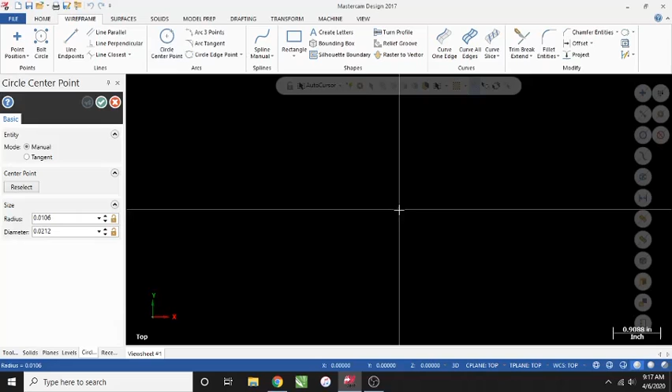So here's what we're going to do. We're going to start by going up to wireframe and selecting the circle center point. I'm going to click in the center and draw my circle out. It's still highlighted in blue, so I can change the diameter—I'll change that to a 6-inch diameter. Then I'll click the green check mark.

Now our geometry is bigger than our viewing screen, so we can hit Alt F1 on our keyboard and it will center it, then I hit Alt F2 and it'll make it a little smaller. If you have a wheel on your mouse, you can scroll in and out to make it smaller and bigger.

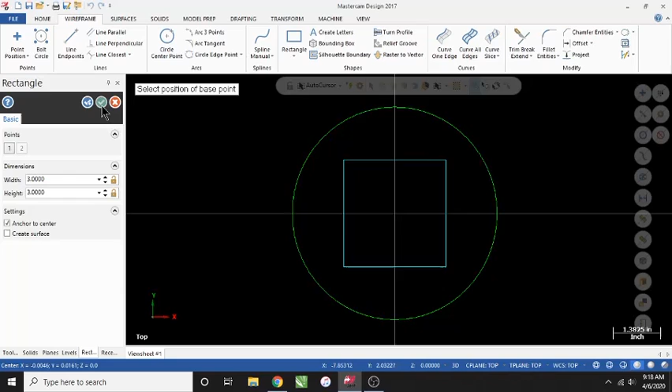Now we've got to add something else to this, so I'm going to do a square. I'm going to click on the rectangle, anchor to center, and put in 3 and 3, then go over and click in the center. That's a little bit of the lag I was talking about. We'll click the green check mark, and now we have our geometry.

This is the geometry that we're going to use for this solid—this is all the geometry we will create. Okay, so now we're ready to create our solids. We see our solids window over here so we can see what's going on after we've created it.

We're going to go to solids, then extrude, and I'm going to click on that circle and click the green check mark because that's what I want to extrude, and we see that we got a solid.

Now in the boxes over here we have some options—we've got extrude, which is what we've done, create body, cut body, and add boss. We're going to use create body, then change the direction because I want that to go down, and I'm going to change the thickness to 2 inches.

Okay, now we're not going to close out of this because we're going to do more operations. The next thing we're going to do is put a hole in it.

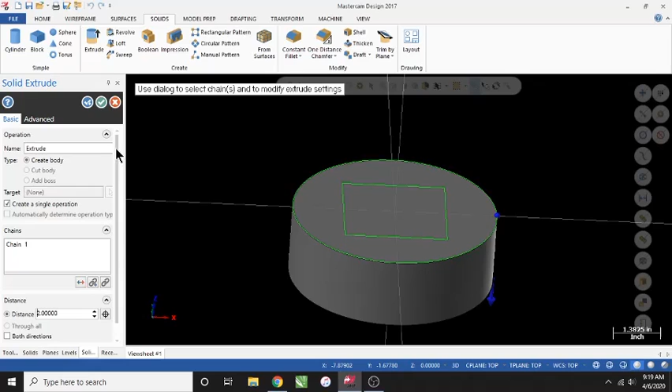So we're going to hit the blue check mark as a plus, leave it over here on chain, and select the square. Click OK. Now it's going the same direction, but right now what we've got is create body—we want to change that to cut body.

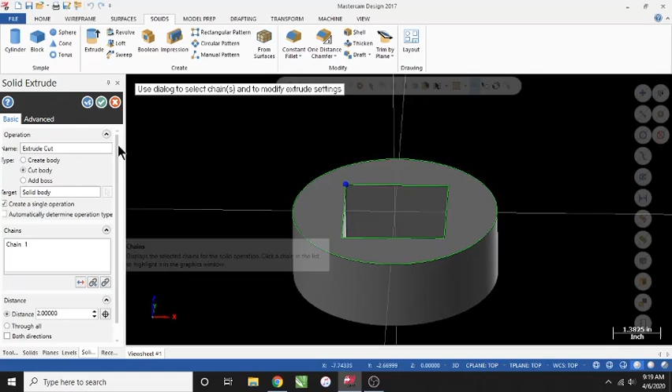Now we've just put a 2-inch hole through there, and we're going to click plus because I'm going to add to this. I'll select that same square, click OK, change it to create body, change directions, and leave it at 2 inches. So now we have created 2 separate pieces.

See how I click on that? Just the bottom highlights. I click on that, and that one highlights. Over here in our manager, we see we have 2 solids.

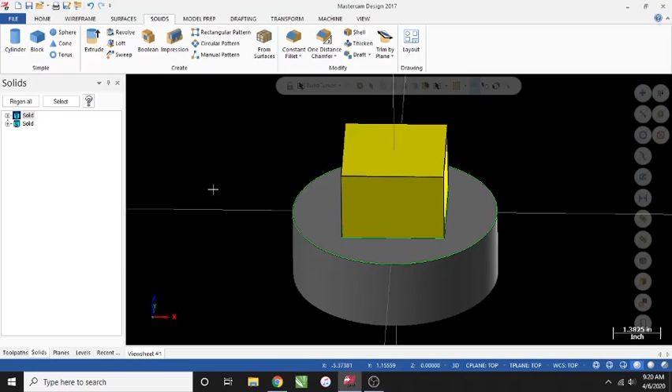Now what I want to do is make those one solid. You would think that because we used the same square to create the hole and the box on top, they would all be touching, but they're not actually touching. So with the highlighted box, we're going to go to transform, and I'm going to translate.

I'm going to click on move, and then I'm going to say minus 0.01, 10 thousandths, and I hit enter, and I'm going to click the green check mark.

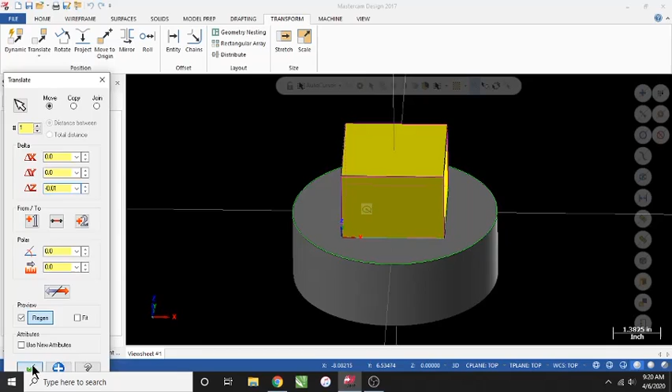We're going to have a box pop up saying you have geometry that you did not move, or wireframe, asking do you want to move the wireframe defining entities, and we're just going to say yes. Okay, so now we have this set 10 thousandths down inside that.

We can go back to solids, and what we're going to do here is we're going to make these one.

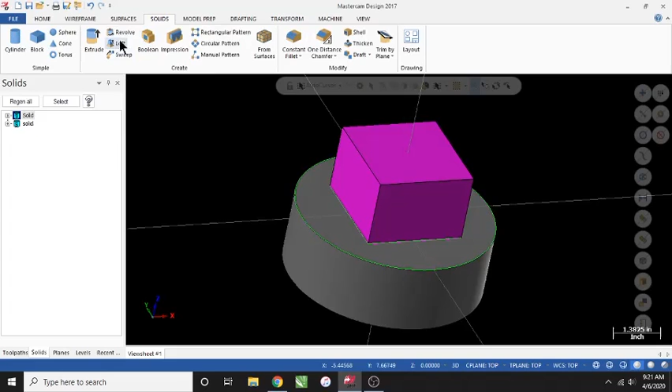Okay, so I'm going to click on Boolean. We're going to do a Boolean add, and it's asking for the target body. There's our target body, and then it says the tool bodies.

We're going to click that box, and we're going to click the green check mark. We're doing an add. We have a solid, we have a body, and we are done with that.

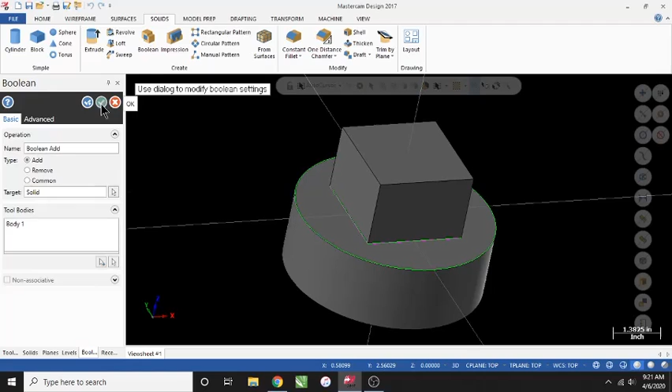We click OK. Now look, we just have one. And if I click on this, they all turn yellow. That is the Boolean add operation.

Now with this, we're going to do some stuff to just make it look a little more like a part. So what I'm going to do is I want to do a fillet.

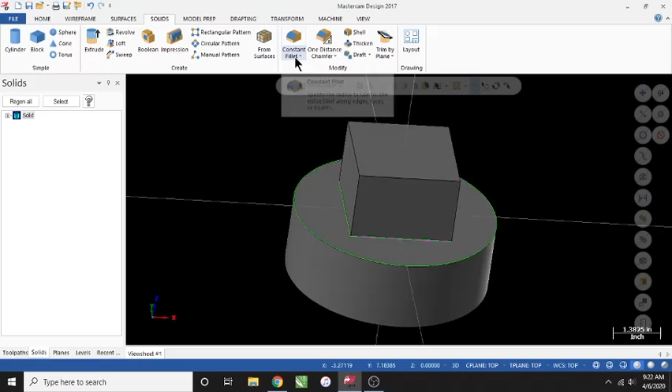I'm going to do a face-to-face fillet. And I'm going to click on this face, rotate it around those three faces, and then I click OK, and it's going to ask me to click on the second face.

So I'm going to click on that face, and it's going to come up. We have face-to-face fillet with a radius. You can see that radius is in there.

I'm going to scroll down on the left, and I'm going to change that. I want a 0.25. Okay, so we have a 0.25 radius in there. And then we can click the green check mark.

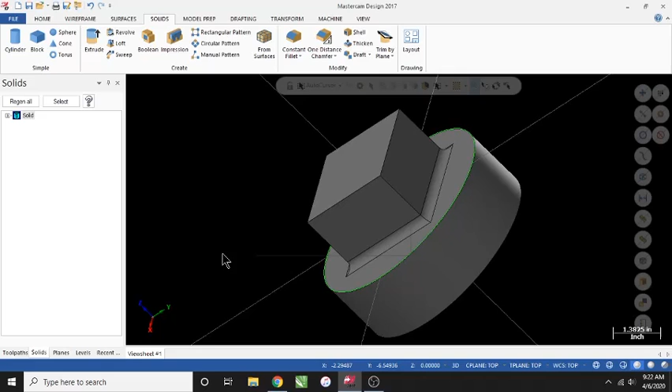I'm going to right click here, and I'm going to go isometric view. Okay, now I want to do a constant fillet because I'm going to make it look a little better than what it is. And I'm going to clear those two out because I just want the edge.

Okay, and I'm going to do all these edges along the top, along the side.

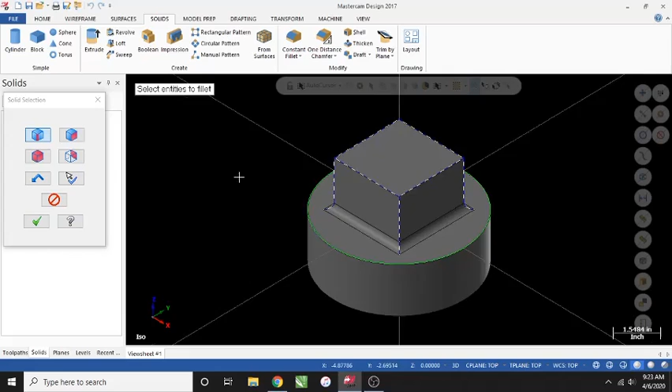We'll click on these edges, and we don't want to forget the back side. Okay, and we click the green check mark, and it puts a 100 thousandths radius on.

Now that's just the default. I'm going to change that also to 0.25. And it looks like that. Okay, so now we have that.

Maybe I want to go ahead and put a 0.25 radius out here on this edge. So I'm going to hit plus, and I'm going to select that. Now I have a radius on that.

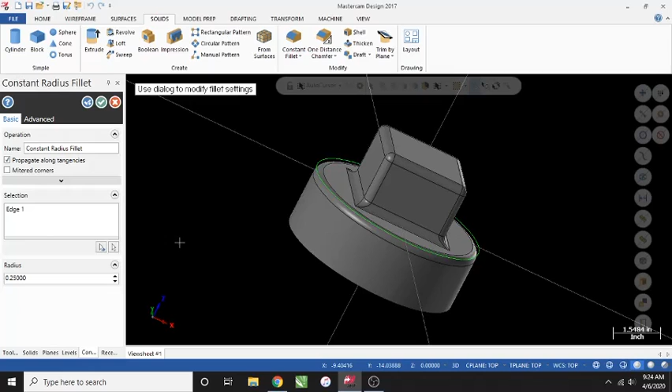It's that simple. So I'm thinking to make this look even better, I'm going to go inside here, and I'm going to put a radius on the inside.

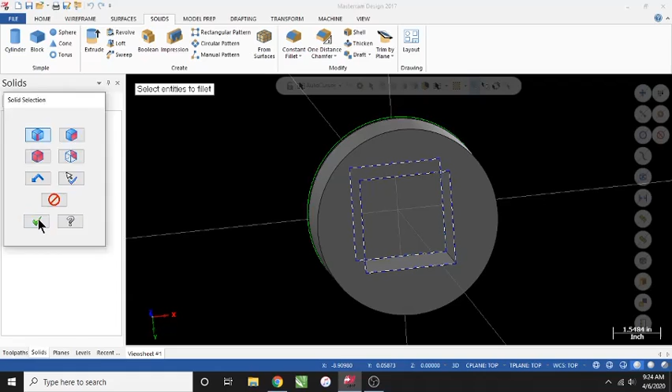Select those and see how it shows it's all highlighted. And I think I'll put a radius out here on the outside. And we have that.

And now we have a solid part. That looks pretty good. I'm going to click OK.

Now to review what we've done, we started with geometry, wireframe. We made a 6-inch circle. We anchored a 3-inch square in the center.

We did an extrude under solids. And then we did an extrude cut. And then we did another extrude where we raised the box up. Then we did a transform. We dropped the box down 10 thousandths.

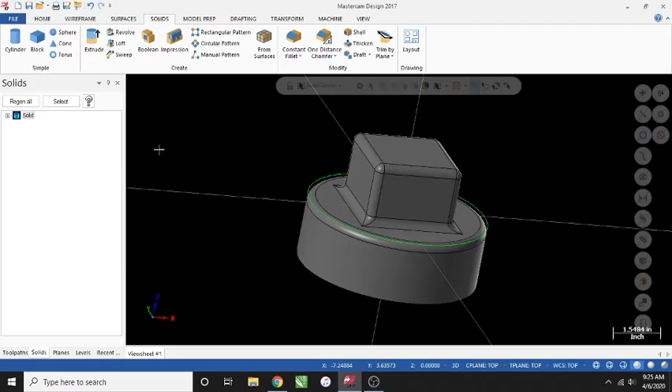And then we did a Boolean operation where we added it so it's all one. Then we did a face-to-face fillet. And then we did constant fillets. And that is a short little video on creating.